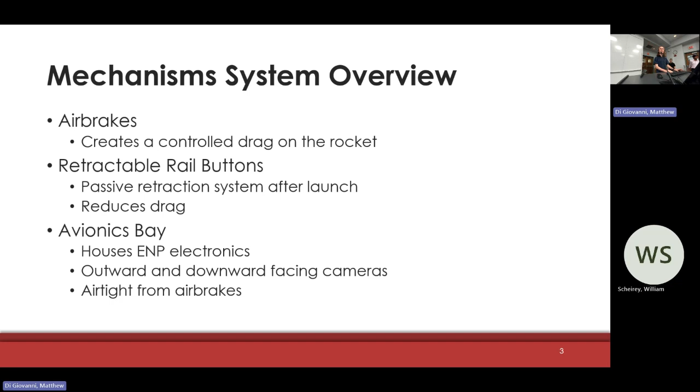So this is the two-stage rocket mechanisms PDR presentation. For the mechanism system overview, we have three subsystems: the air brakes, which creates a controlled drag on the rocket; brand new this year, the retractable rail buttons, which will implement a passive retraction method after launch to reduce drag that rail buttons cause; and then we also create an avionics bay, which houses the electronics flight computer. It'll have some cameras, and it needs to be airtight from the air brakes themselves.

This year, we have changed a little bit of how the systems are interfacing with the rocket itself. The plan is to create a bay that goes completely in between two couplings. The top plate and the bottom plate would attach each to a coupling. There would be rods through the center for structure, and then that center coupling would separate the avionics bay at the top from the air brakes at the bottom.

So for our air brake system, we have Raj and Hayden. For our air brakes, compared to last year, we have some design requirements that we do need.

Where's that laser pointer? It does need to fit within the allotted space that we've been given. We can minimize that if we have extra, that's good too. But we're trying to improve and make more efficient the amount of space extending past the sides of the rocket, giving us more than the 5¼ inch squared of extension outside of the rocket that we had last year.

The fins that do come out, we have a fin system. They need to be flush at launch to reduce drag there. And when they do extend, we need to make sure that through their entire movement, they don't create a moment on the rocket, messing with the rest of the control systems, messing with any of the guidance systems.

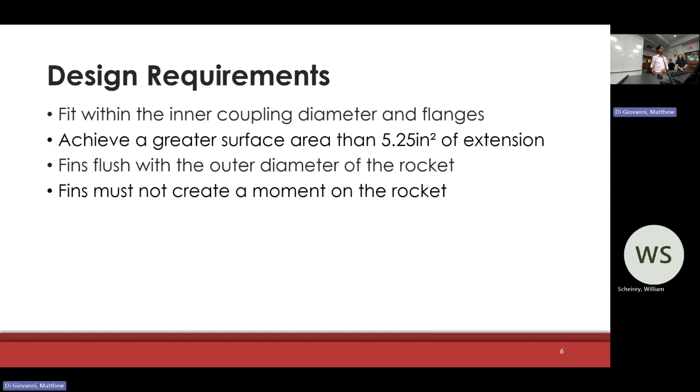Earlier, we had a separate design that we had played around with. It was based off these petals that would rotate out of the rocket, controlled from a gear mechanism on the inside. But we decided it wasn't really feasible because the amount of area we would get outside of the rocket would have been 5.76 inch squared of surface area just outside, giving us leeway to put drag and control the rocket.

But as a trade-off, it chunked out over 60% of the diameter of the rocket, and that's going to mess with structure, the stability. So from last year, that was pretty much a downgrade, and we couldn't see any justification to use it because last year we only had around 40% chunked out, and that really kept a lot more of the structure and strength of the tube.

For this year, we came up with a flap design that's been seen before, but essentially we would cut out parts of the rocket tube and attach a mechanism from the inside to extend them from flush to out, and that would let us control the drag that we would put on the rocket.

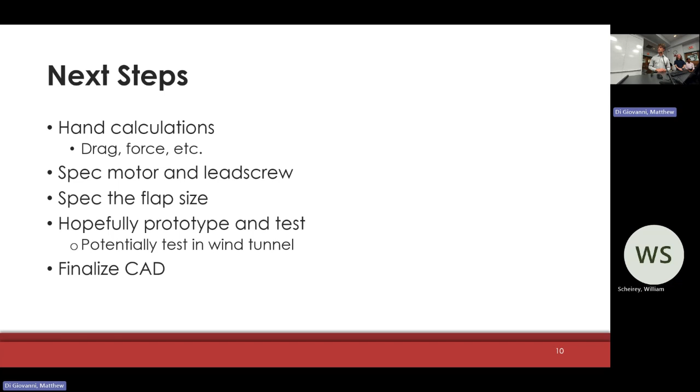I'm in charge of the avionics bay. My name's Colin. For the design requirements, we have to fit all the components from the electrical inside the coupling designated for the av bay.

We include 2 cameras, one facing down similar to last year for the air brakes, and one having an external view. We also need to mount the flight computer, the battery pack, external GPS, and then verify that it's airtight with the air brakes.

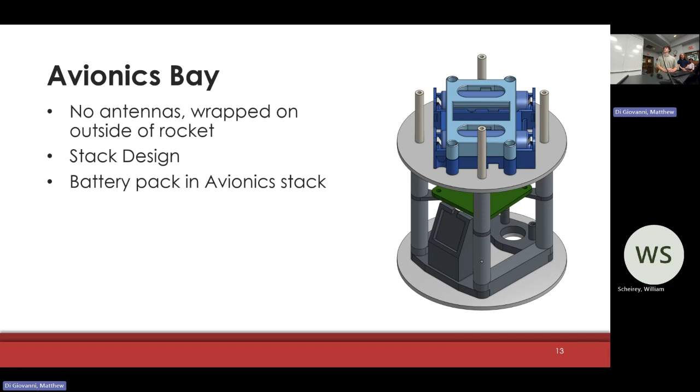So we don't have to worry about the antennas this year. Last year we mounted them; this year they're going to be wrapped around the outside of the rocket. We're going for a stack design similar to last year, but differently, we're going to mount the battery pack in the av bay to help with wire management and give the air brakes more space.

The rods for the structural support right now are about 1/4 inch in diameter. That may change due to structural support with the air brakes, and everything is pretty much subject to change depending on ENP.

So moving forward, we have to get approval on the design, integrate it with ENP, and adjust the dimensions. Then we're questioning exactly where to mount the battery pack, depending on weight and wire management—whether it should be on the bottom of the coupling next to the air brakes versus on top.

And we still have to CAD up and design an outward-facing camera, hopefully to minimize drag. That's still up in the air, depending on where exactly we mount it. And then finally, do all the hand calculations for the forces, support, and structural aspects. That's pretty much it.

All right, next up we have retractable rail buttons, which Ben and I are working on. As far as design requirements go, we're making it to interface with a standard 15-15 launch rail. We want a retraction method that causes minimal friction during launch, and we want the button flush with the outer diameter of the rocket after launch.

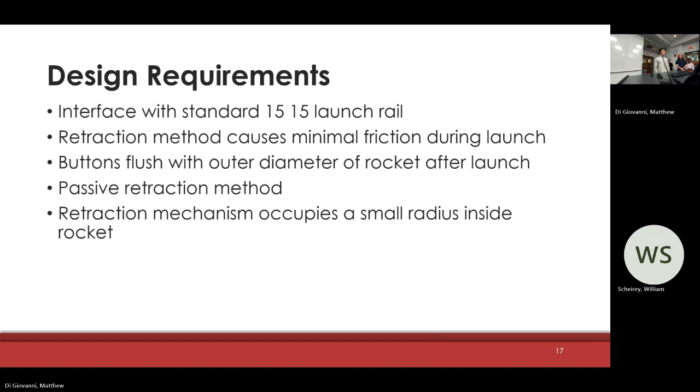We want a passive retraction method, so we don't want to involve any electronics or motors—so we came up with using springs. And then we want the retraction mechanism to occupy a small radius inside the rocket.

And then we'd have something at the back to stop it, so it retracted to the right distance. And then last, we had a linkage design, which utilized two different links, one that wasn't free to rotate on a rail and another one that was free to rotate, and then a spring that would essentially pull it back into the rocket.

So the pros and cons of this design. For the post design, it was the largest by far. The ring around the whole rocket wasn't very practical, and we decided there weren't any major advantages to this one.

The button design was the smallest. It only requires one spring, which makes it the least complex, and it also has the fewest number of parts.

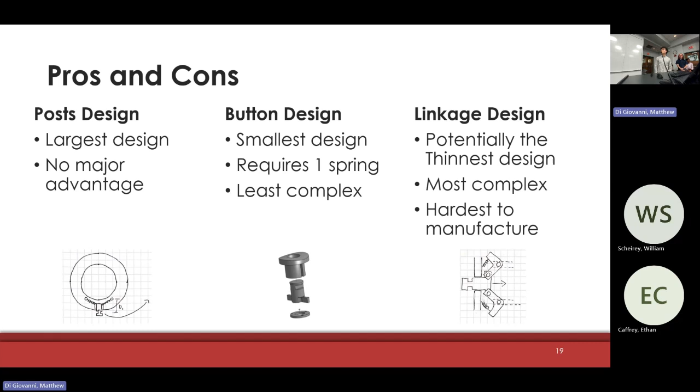As far as the linkage design goes, it could potentially be the thinnest design because it'd be wider than it goes far into the rocket. However, that said, it's certainly the most complex with the two different linkages and the spring, and it has the most parts, which would also make it the hardest to manufacture, which made us believe it wouldn't be very practical to actually do.

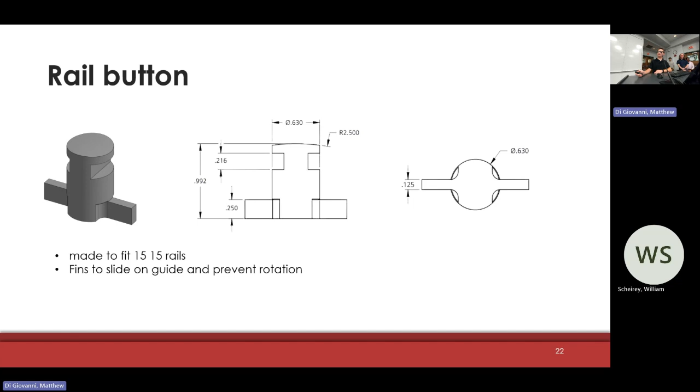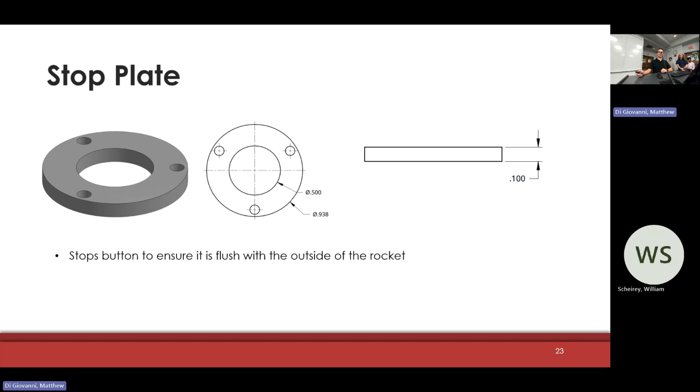And then for the button itself, this would be the most complicated part to design out of this system. Again, it's made to fit those 15-15 rails, and the fins here help make sure it aligns properly. It again has that radius to try and keep it as flush as possible. And then the stop plate is very simple, and it just helps keep the button from going too far into the rocket, so it's again as flush as possible, reducing as much drag.

And then next steps would be hand calculations to inspect the spring, to figure out how strong the spring needs to be, what forces are involved to make sure our mounting mechanism will work correctly, and then hopefully do some prototyping and testing, and then finalize the CAD with that mounting mechanism. Any questions?

No, we would need to calculate the force that would be pushing in on the flaps before we can spec the lead screw. So that's all planned to be done in the future.

We have not looked into speccing the motor yet, but if that's required or wanted by EnP, we would look into that.

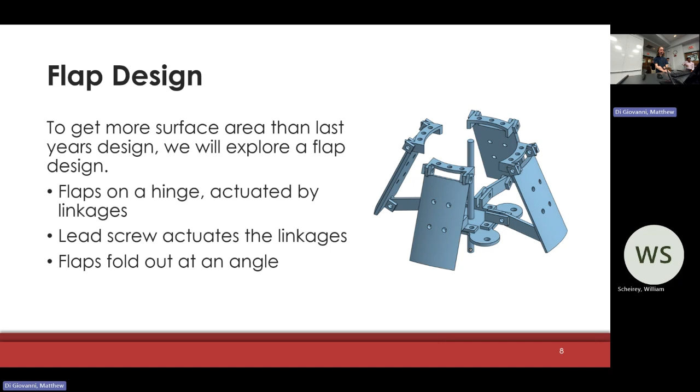What percentage of the body tube is missing? I know you had actual percentages for last year, so do you have any idea for this one, especially with it having to not be exactly flush. So how it's modeled right now, there is no tube on that bottom section.

We can look into adding sections of the tube back, but it would be a considerable amount of tube missing. That's what those rods in the middle are for, so we're depending entirely for that section of the rocket on the rods.

What are the rods made of? We have not looked into speccing that yet.

Kind of a similar question. So if this is completely open, I would be a little concerned about air pressure affecting the mechanisms.

So you're saying it would almost look like how it does in the render, just kind of open? Yeah, but there'd be... We imagine the rocket tube kind of cut 4 ways, and then each of those 4 pieces would be attached to those flaps. So when it's folded together, it all comes together and it's one tube.

And then you're saying there's not going to be an inner tube? Yeah, there's no structural support from the tube, but it's there for aerodynamics.

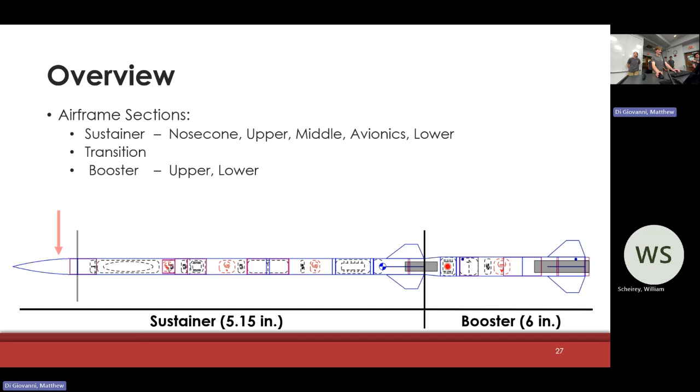So the two-stage rocket is broken up into two stages, the sustainer and the booster. The different sections that need to be built are the nose cone, upper airframe, middle airframe, avionics airframe, lower airframe, a transition tube between the two stages, and then a booster body tube, upper airframe, and lower airframe. One key thing to note is that the sustainer has a diameter of 5.15 inches, and the booster has a larger diameter of 6 inches.

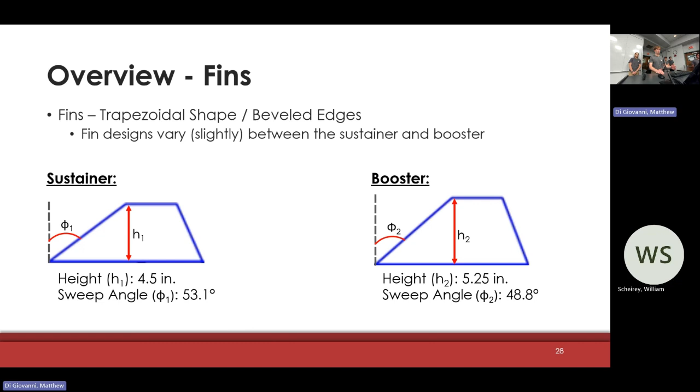Now to talk about some of the analysis work we're doing. We're performing finite element analysis on the fin can assembly using Abaqus CAE. You might be wondering why we're not using Ansys, and the answer is because it has some struggles with interfacing between composite layers, which without proper interface can lead to possibility of composite failures. Obviously we don't want that when analyzing everything we need to analyze.

Some analyses we plan to run are thermal load tests, which will study how thermal energy affects the structure over time; thermal stress analysis, which will study mechanical stresses that develop in the material due to temperature changes; modal analysis, used to determine the natural frequencies and mode shapes of a structure, such as in fin flutter calculations; and dynamic analysis, which shows how a structure actually responds to real-world time-varying forces, such as thrust buildup, launch pad vibrations, and stage separation.

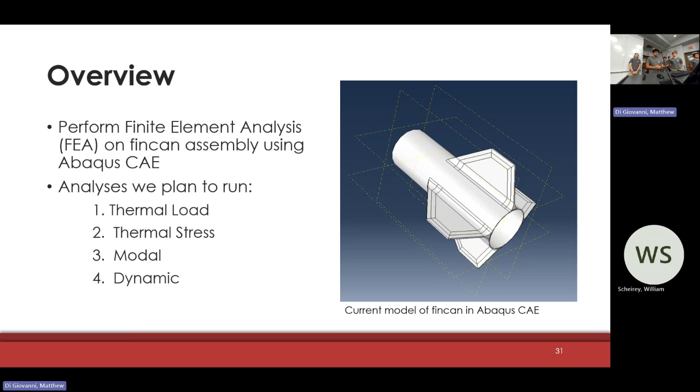Building off of previous work from last year, they studied and analyzed fin phenomena such as fin flutter, and they manufactured and tested composite coupons. Different from what we're doing, they used Ansys to make structural and CFD simulations based on their fins, using experimental data that they got from their composite coupon tests.

For our progress in A term, we have built familiarity with Abaqus. We used tutorials and began working on our FinCan model. We learned how to create partitions on imported models in Abaqus. A partition is a separation made between different parts, such as the fins and the body tube, to allow us to assign different material properties to get more accurate results with our finite element analysis. These partitions are particularly important for assemblies that have a lot of parts, such as the fins, fillets, and the body tube.

We also researched testing procedures and obtained access to the Materials Testing Lab to actually conduct those testing procedures. And we learned how to use the results of testing to calculate the required material properties.

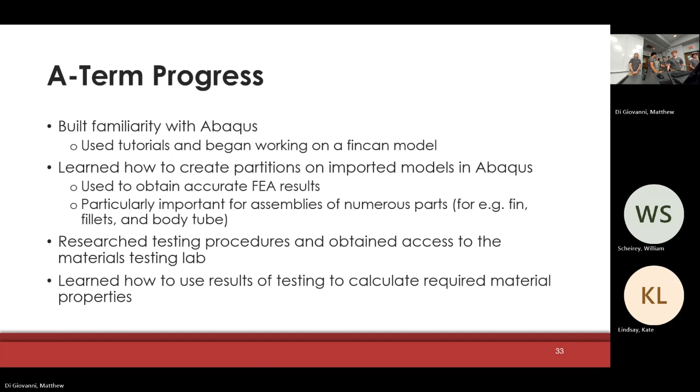Two different types of tests that we'll be conducting to determine the material properties are a tensile test and a shear test. We'll be conducting these tests using coupons made in the shape of dog bones, so that we can center the forces into the center of the coupon to more accurately understand how the tensile stress affects the coupons.

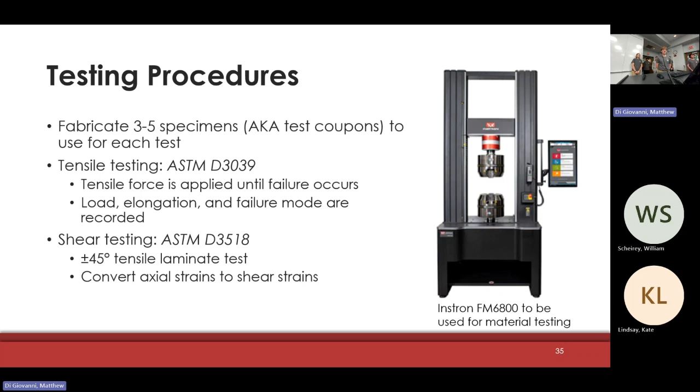We will be fabricating between 3 to 5 specimens, and we'll be conducting these tests according to ASTM procedures. We will be doing them on machines like what you can see in the slide, such as the Instron machine, which is a tensile testing machine.

Based on these tests, we will be determining the different material properties, namely the modulus of elasticity in the 1, 2, and 3 fiber directions, the Poisson's ratio in the 1-2, 1-3, and 2-3 planes, and the shear modulus in the 1, 2, and 3 axial directions.

If you are unfamiliar with the composite coordinate system, 1 refers to the direction that the fiber is running, 2 refers to the transverse direction, going perpendicularly, and 3 refers to perpendicular but in the upward or downward direction. The planes of 1-2, 1-3, and 2-3 are combinations of those directions.

One of the major design challenges our composite team tackled this term was how to bevel fins, and more specifically, how to design a jig for making beveling fins easy and fast. A bevel is essentially a chamfer on the edge of the fin that makes it more aerodynamic by reducing drag. But we need to be careful not to bevel it too much, where it would create essentially a knife edge that could potentially damage the fin when it impacts the ground.

Building from this, our design requirements were a 4-degree double bevel on both the leading edge and the trailing edge of the fin, and a 1 millimeter flat between the 2 bevel sides to avoid a knife edge that's both dangerous and potentially damaging for the fin.

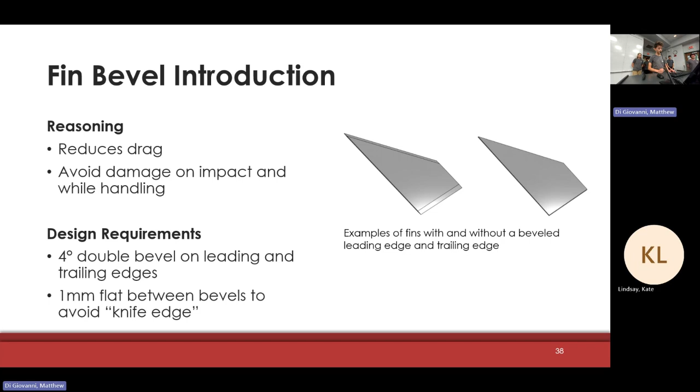One important thing to note is that this sanding jig has a physical stop that prevents the fin from going in too far and taking off more material. So the sanding procedure is pretty straightforward. No need to do any weird measurements or markings. It should be butted right up against the hard stop.

So the pros are that this is fully 3D printable in one piece. It fits on the side, about 8.5 by 8.5, so it'll fit in the bed of a P1S or similar size printer. It's got 0 moving parts, so minimal assembly and mounting time. Fairly easy to sand one bevel in one smooth motion, so no need to go in and out and potentially lead to uneven surfaces. And it locates off of pre-existing holes, which makes it pretty consistent on the sander and should lead to minimal setup time.

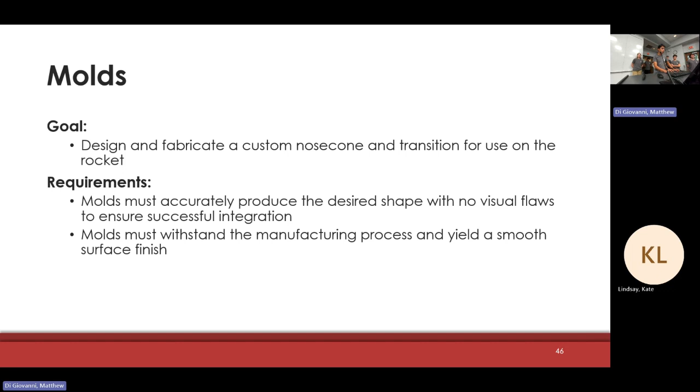Then we would apply a gel coat to give us a super nice finish. Then we would apply our composite layup - that would be half the mold. Once that cures, we could take off the parting plane of the supporting structure, flip it over, and do the other side.

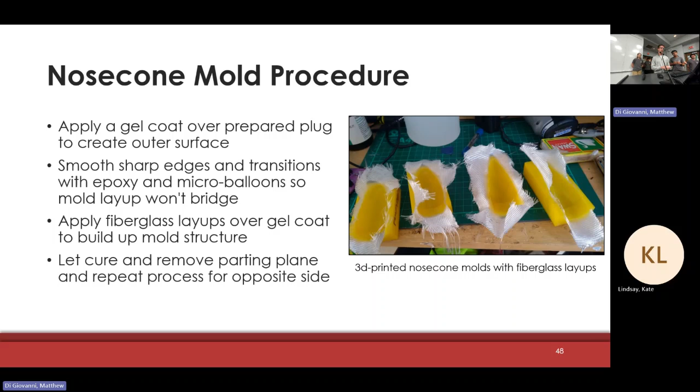So here's some of the procedure. Like I said, doing it in 2 separate parts, we would do traditional composite layup for both sides, and that would give us some really good finishes and good durability. Going more into the pros and cons - surface finish would directly mirror the plug, so we could spend a good amount of time making the plug very nice, and that would translate to the mold. Secondly, our mold is going to be very strong because it is just composites.

And that would allow us to do future manufacturing processes like autoclave or heat for curing. The mold would be very long lasting - it can be used for years and years because it is composites again, and it can be cured with heat and other types of curing techniques like autoclave.

Some of the cons are it is a bit more labor intensive and does take some more skilled labor to produce, as well as being slightly more expensive than just using something like a 3D printed mold.

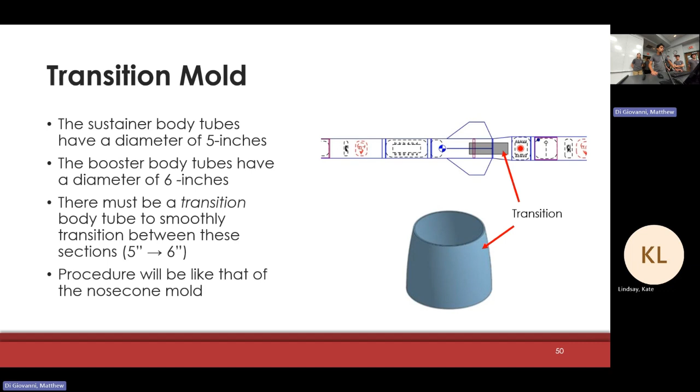Okay, so onto the transition mold. As previously mentioned, there is a small 1-inch difference between the diameter of the sustainer body tube and the booster body tube. Thus, that's why we need to make a transition body tube to make a smooth transition between these two sections of body tubes. The procedure that we use for the transition mold is the same that we use for the nose cone.

So we have some additional manufacturing planned for later in the year. The first of which is fillets for the fin can. Fillets are the material that bridges the gaps between the fins and the tube itself. The fillets help increase the aerodynamic efficiency as well as the structural integrity of the fin can. We plan to create the fillets using a two-step process of an inner fillet and an outer fillet. Both are constructed using epoxy mixed with silica powder. The silica powder and epoxy is applied to the fin tube and shaped using a fillet tool.

The initial layer is built and then shaped with the fillet tool. The outer layer is placed on top once the inner layer cures, and then is shaped using a fillet tool as well as a dowel, which is placed on for the initial setting process in order to maintain the desired 1-inch radius.

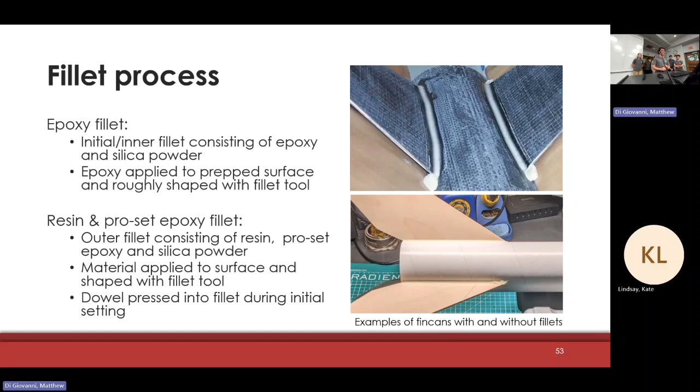We also have layups, which increase the structural integrity of the fin can. We use a wet layup process that includes stacking composite layers of fiberglass in a 90, 45, and 90 degree orientation. I have pictures of some practice layups we've done during A-term. The procedure includes applying a layer of epoxy to the fin can, applying the layers of fiberglass, and then layers of peel ply and breather layers, which help secure the layups in place. Then we vacuum bag the entire fin can for even distribution of pressure while the layups cure.

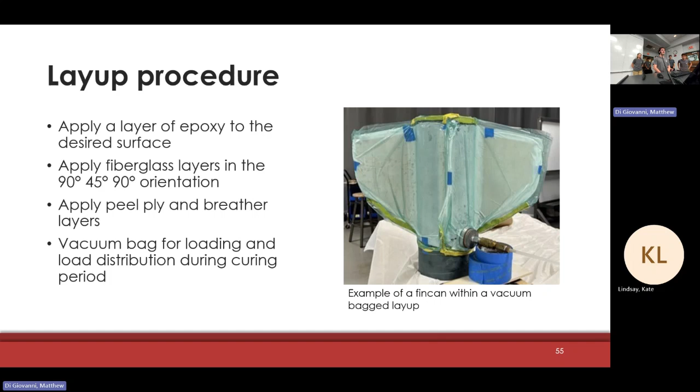The entire thing's vacuum bagged for even load distribution. I have a picture here showing an example of a fin can that is vacuum bagged. And that is all. Questions?

Nose cone—have you guys thought about putting a tip on it or anything?

As far as that goes, we haven't got that far ahead yet. That's been outside of the scope of our model, but in the next few weeks of B-term when we finish up the model, we're definitely going to consider doing that and look into how it would benefit our model. We haven't decided on aluminum, but we're not going to have the composites go directly to a point. It's going to stop a little bit before, and then there's going to be a little tip that screws on, because it's much easier to mold it and do the layup when it doesn't go directly to a point. So yes, we will.

I know you talked about post-manufacturing testing to make sure you're within the right specifications and tolerances. How is that going to work for your fillets? The fillets are a pretty standard procedure, tried and proven in the past, so there's not much testing that needs to be conducted to ensure they work. Are you referring to the material properties, or the physical dimensions? The physical dimensions are just standard, and the angle for the leading and trailing edges is something we are not calculating.

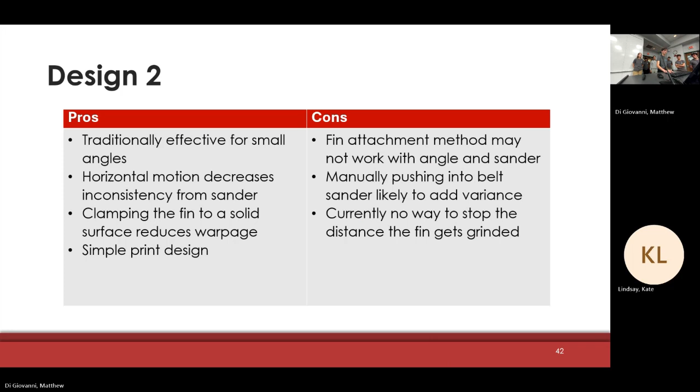That angled portion on the first model is already at the degree needed, so the actual angle of the bevel will be correct. It comes down to the length, which I need to make a hard stop for, to get the right length. Right now I don't really have a way to stop that length, but that's what I'm working on to fix.

Slide 36, I just had a quick question.

So you're going to perform FEA on the fin cans—is that the entire can with the fins, the entire structure? That's a big reason why we're using Abaqus over ANSYS, because you can use partitions to separate all the different materials and parts of the entire fin can, and individually and collectively simulate the fin can.

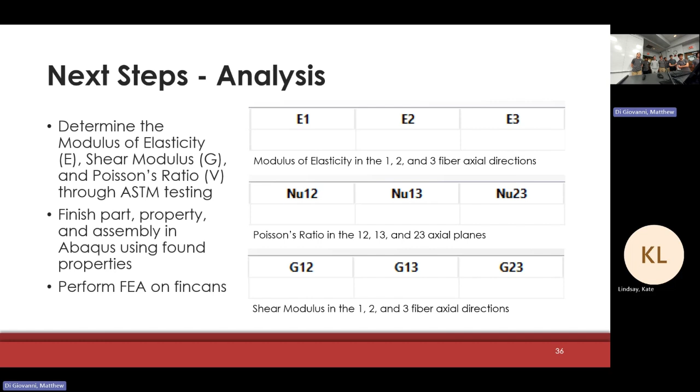Could this jig be made out of aluminum? I know you're thinking hard material. That would be a lot of material. I think first we're going to test one out of 3D printing, see how that works. If there are a lot of problems, we did look at other materials—one that came to mind was using a glass plate, or something similar like a Creality 3D printer plate, on top of this surface, so that even if the 3D print comes out a little uneven, you can put something flat on top so the fin always has good contact area. Yeah, aluminum would cost a lot and take a lot of operations, but—three parts, right, two sides.

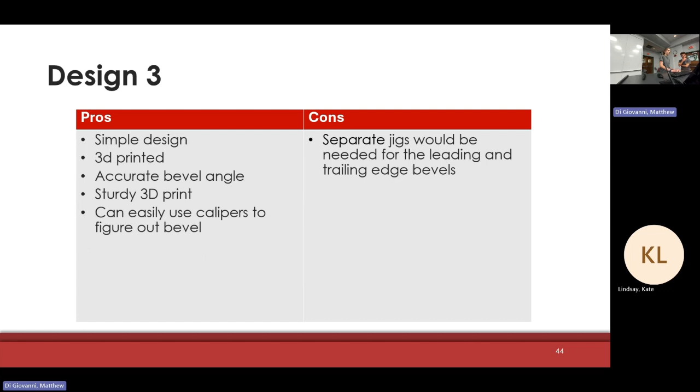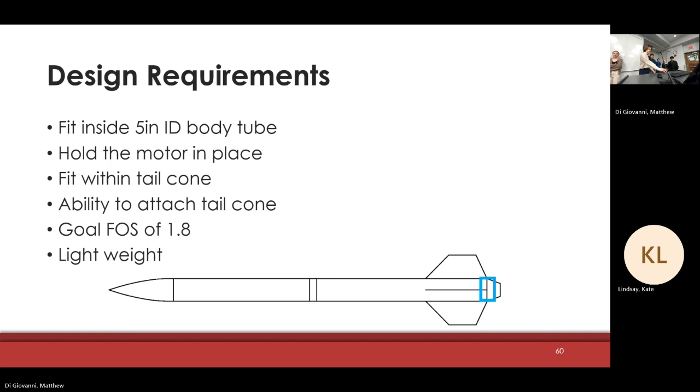Oh, there we go. Yeah, that's right. Okay. So going into, oh, the slides are being slow, and now it's back. Okay, so the first design that we explored was using an Aeropack retainer.

We're currently researching the pros and cons of making this in-house versus purchasing it. So I'm going to talk about some of those.

So for making it in-house, some of the pros that we talked about was, for starters, it's a learning experience. You're making it yourself. It also allows for more customization and opportunities for weight reduction because we're able to design it ourselves, and also more likely to fit in the tail cone because we can create the dimensions ourselves since we're designing it.

And then in terms of cons for making it in-house, we're going to have to pay more attention to designing for manufacturing. We're also going to have to spend time manufacturing. And then we're also going to have probably larger tolerances because we're less capable of manufacturing it versus a professional company.

So for purchasing it, the pros of that are easier manufacturing process, and it's a method that's worked in the past. Some of the cons of that, it might not fit in the tail cone since the dimensions are fixed and we can't edit them, and also there's less opportunities for weight reduction.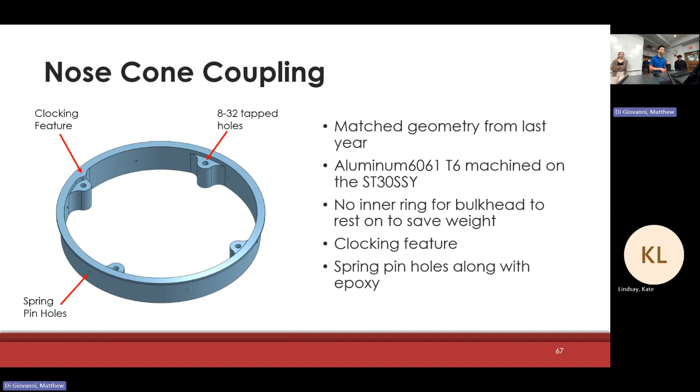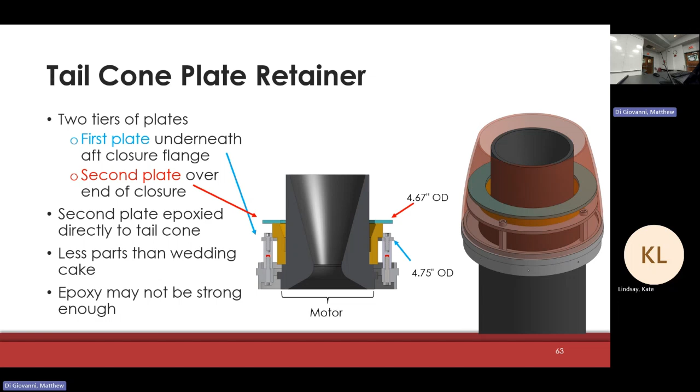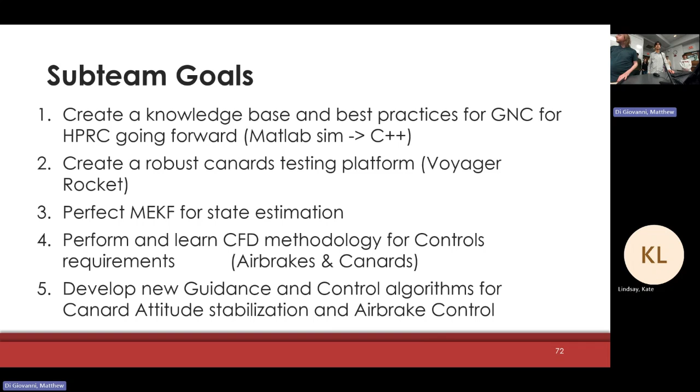Additionally this year, for our smaller projects, we're creating a canards testing platform on the Voyager rocket, a small rocket going to about 900 feet. We are also developing a new state estimation algorithm called the multiplicative extended Kalman filter. Additionally, we are doing CFD for the air brakes and controls, as well as developing new guidance and control algorithms for canard attitude stabilization and air brake control.

Timeline-wise, for last term we designed the canard hardware and developed the multiplicative EKF and control algorithms in MATLAB. For this term, we are looking to deploy the multiplicative EKF in C++ for the November 15th launch and have that as a first test.

We want to finalize some of our control algorithms and test some of them for cost-benefit analysis. We are going to perform CFD on the two-stage rocket and get that ironed out for our air brake controllers, then make the actual controller in MATLAB and manufacture our canard system for the Voyager rocket. In C term we're launching, and in D term we are going to do more work with the air brakes.

Okay, that's off to Kieran. Hello, I'm Kieran, I'm in charge of CFD for this year. For CFD, we ran simulations on the canards, but in order to know what we are getting from the CFD, we have to determine the major challenges of installing the canards.

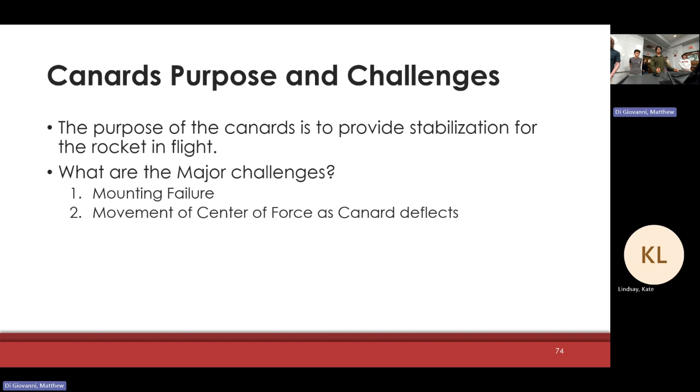The first major challenge is the mounting - how are we going to mount it onto the rocket, and what kind of forces does it have to withstand from when it's going up and at its max airspeed? We also have to account for how the center of forces, or center of pressure, moves as the canard deflects to actually apply a pitching moment.

So in order to configure our computer simulation, we have to put three main parameters into the software, which is ANSYS Fluent. We put in the max airspeed, which we got from OpenRocket, and that was 271 meters per second. We have to put in the canard deflection angle, and we have to tell the computer what kind of equations to use.

For the deflection angle, we did some research, and we found that a max deflection angle of 25 degrees would be optimal, as it provides about 70% of the max lifting force without encountering major forces or flow separation. However, there can still be a small amount of flow separation at 25 degrees.

So to account for this, we're using the shear stress transport model for the computer, abbreviated SST K-omega. This includes equations to account for vortices that may form and flow separation along the edges of the canard.

So after we got those parameters, we inputted them into the simulation, and this allowed us to get the max force and the max moment experienced by the canard, both at 25 degrees. It was 72.9 newtons and a max moment of 1.74 Newton meters.

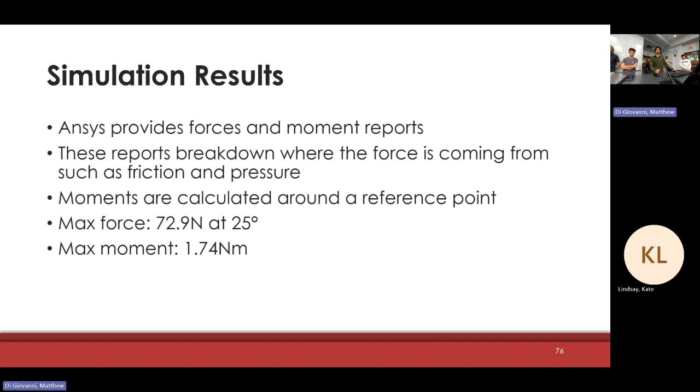It also gave us a breakdown of where these forces were coming from, such as if it was coming from pressure or from friction against the air.

This gave us a value of 23.6 millimeters back from the leading edge of the canard along the chord line. This is about 45% back, since it's a 50 millimeter long canard. Then at 25 degrees, when we redid the calculations, it gave us 23.1 millimeters, which is a good sign because that means it makes our mounting easier to account for, since the center of pressure isn't moving as much.

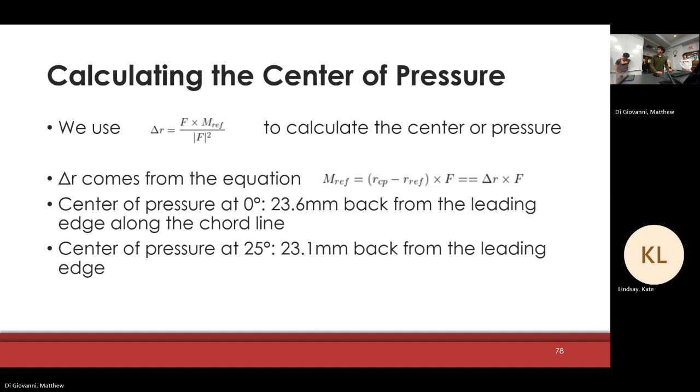With that, I will pass it off to the hardware team.

Hi, I'm Joe, and along with Noah, we did the hardware development for the canards. So, some of the guiding principles we looked at to shape how we approached this design.

Because this is a new experimental subteam, we're operating under the assumption that a lot of things are going to change and a lot of things are going to break. As such, we put a very high priority on modularity and adaptability to future use cases. We wanted the core canards module to be something that can be used for projects we haven't even anticipated yet, and be able to handle loads we aren't necessarily expecting on this initial iteration.

Also, to make life easier for the people on the software and controls side of things, we wanted to ensure that it would be as rigid and responsive as possible, both in the mechanical design and some of our electrical component choices. So keeping those guiding principles and some of the hard design requirements in mind, our design architecture ended up being...

...a servo linkage that allows for independently controlled canards. Each canard can be controlled in terms of the degree angle independently. That can allow for pitch control, but later on also roll control, and also pitch and yaw control if that's something we want to pursue later.

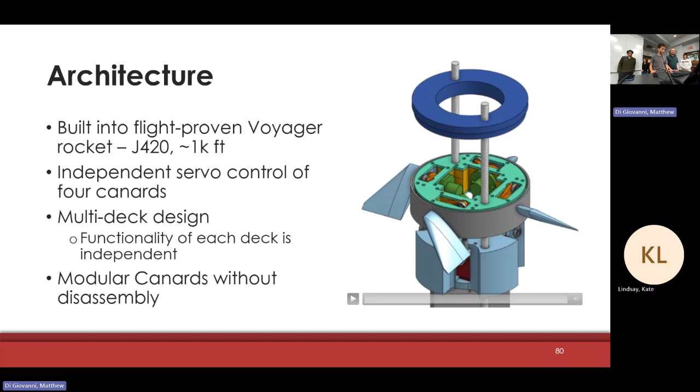Starting from the bottom, the entire system will be powered by four 18650 batteries, so about 7.5 volts, which is more than sufficient power for the servo we chose. We're going to be using COTS battery holders. One thing to note is that the batteries are horizontal, so that when the rocket accelerates upwards, we're not going to lose contact with the battery leads and get wonky results from that. The batteries themselves are offset to allow for fastener clearance and for mounting accessibility in order to connect the two decks together.

And then in the middle, there is a switch and a little channel for wires to go up to the switch, power wires to go up to the switch, which then go back down to power the servos.

This 3D printed piece here is both constraining the subsystem as well as providing mounting positions for the servos. We've got 4 servos arranged in a circular pattern. Highlighted there is where the servo sits and where the cutout is. The little divot is for wire clearance to allow for wires to snake up and around to the switch and then down to the batteries.

One thing to note is that the profile is radially constrained using this 3D print, so it'll probably be 3D printed out of something like PETG. Depending on how much weight we're using, probably 20 to 30% infill. We haven't run the exact numbers yet, but the weight should be pretty manageable, and the thing is pretty tall, so it should counteract any bending forces and stabilize the system.

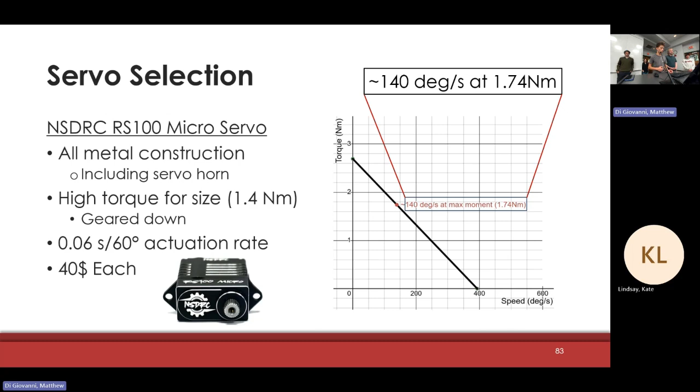Moving on to the canards level, taking into account the numbers we were getting from CFD, we did a quick shaft bending analysis to make sure that normal force wasn't going to deflect things. This is with a 1/4 hex aluminum profile, which you'll see the reasons for on the next slide. The deflection under those loads is really trivial, not a big concern, but it's nice to have the system overbuilt in case you're going to be using potentially larger canards in the future. There are also some practical reasons that set a minimum size for this shaft.

The simple solution would be to have your shaft built into the canard and just connect the linkage assembly directly onto that. But in practice, that would be really difficult because anytime you need to replace the canard, you have to take apart the whole linkage, undo shoulder bolts and such, and take things out of bearings — it would be a whole procedure. So we wanted to make it operationally much simpler, even if part-wise there's a bit more going on.

So we came up with this female hex sleeve design, where the shaft that the linkage is driving is actually a hollow hex profile that then interfaces with the male blue hex profile on the canard. That is retained in place by a set screw that is captive in a groove.

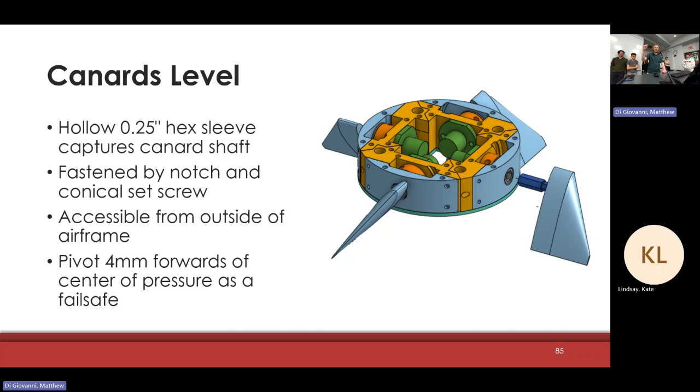You'll also notice that the pivot point is forward of where we calculated the center of pressure. That is intentional, as a failsafe. So that if there's any kind of electromechanical failure with the system, the canard has aerodynamic stability and it will tend toward pivoting to a zero angle of attack position. So you're never in a situation where the canard is locked in a position giving a strong control authority command that we did not intend.

So getting more into the cross section here, you can see the dark blue is that canard shaft, and the gray stepped profile there is the captive hex sleeve. It's just geometrically constrained between the bearings on either side of it. The reason that set the minimum size for it is we didn't want to have to buy an expensive broach and then abuse that broach by making a hex hole several times its diameter. So the sleeve is turned out of its COTS aluminum extrusion, and quarter-inch hex internal is just the minimum size for that.

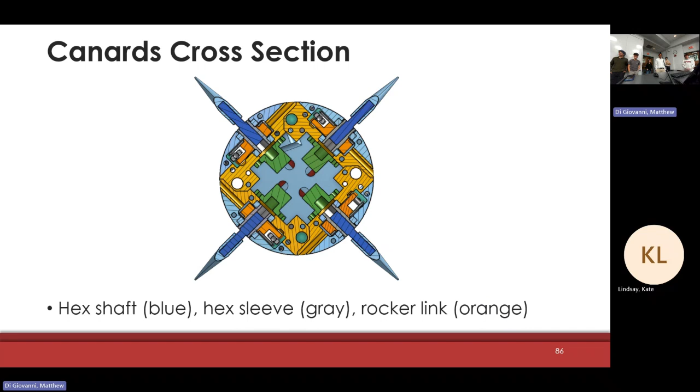And then the orange part is this link right here, your rocker link, the other side of the linkage. That would be press fit to the core sleeve with a Loctite 609 to get a solid bond.

You're using M3 shoulder bolts for the pivots, and we have absolute encoders directly on the canard shaft for feedback. We use the US Digital MA3.

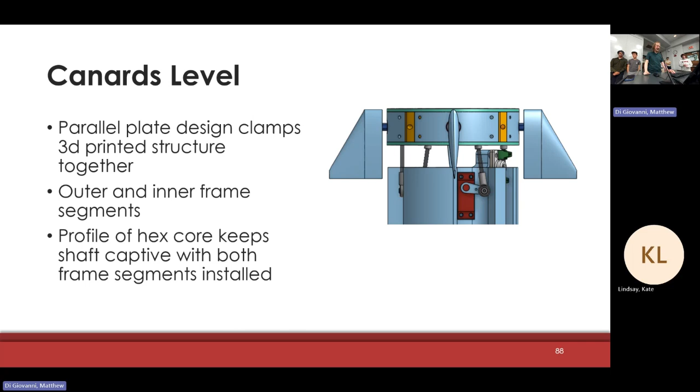The whole structure is held together by these two parallel aluminum plates. There are inevitably some thin sections in these 3D prints, so passing some of the structural load onto those parts helps with that. The electronics level, which we haven't gone into yet, is basically going to be standoffs above the canards level. We'll be looking more at that in B term.

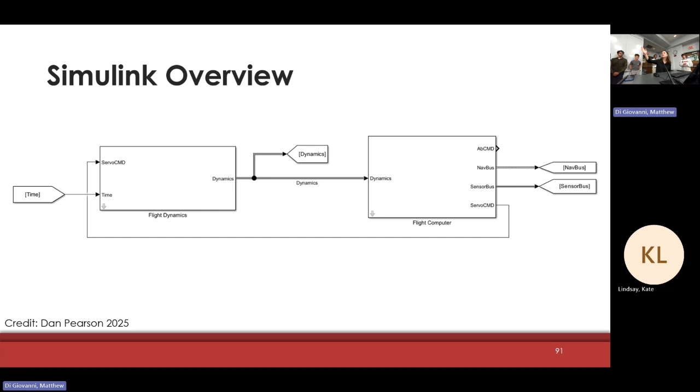Essentially, this is a Simulink model. It consists of both the plant model, which for those unfamiliar, models all of the natural rocket dynamics, and the flight computer itself, which is the piece we'll be most interested in. This is where, for modeling purposes, we implement the sensor fusion, which these guys are going to talk about in just a second, our guidance algorithms, and our canard actuation commands.

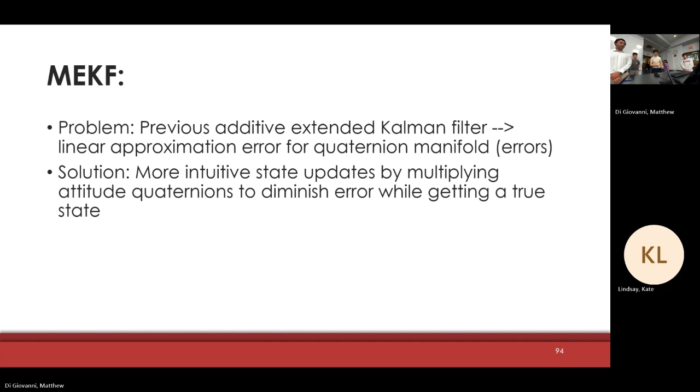I also worked on the MEKF. Just extending on this—I don't really know how to play the video, but basically the reason why we have an MEKF is because it's simply a means to an end. The importance behind it is that the end goal is to have a reliable estimation of where we are, because knowing where we want to be is only half the equation. The other half is knowing where we currently are. And knowing this allows us so that when things go wrong, because they inevitably will, we know exactly how they went wrong, which is actually the important thing.

So over here, it allows us to have our estimations. We can have it in quaternion format. We can have the Euler angles derived by it. If the video would play, the animation will...

Knowing where we are accurately allows us to do cool things like actually modeling it, whether in 3D. More importantly, we could plot our expected versus our realized outputs or states. Knowing this, when things go wrong, we know what to account for and what we need to improve in the future, as opposed to our past time steps and our current and future predicted time steps.

My name is Abe, and we're talking about EKF math.

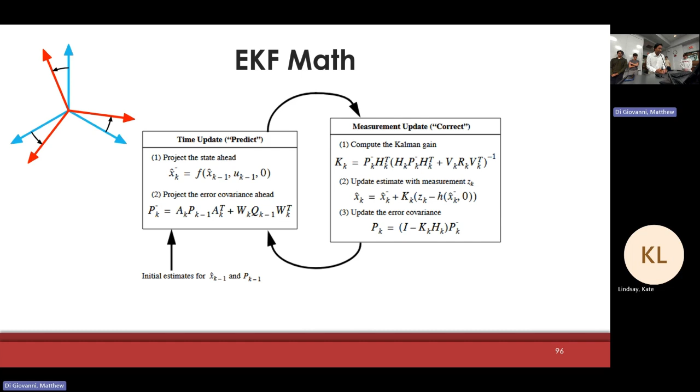Over each time step, we take in our measurements and need to use how much we trust each measurement, combining that mathematically to give us what we think is our true prediction. The first equation predicts our next time step, and then we propagate the covariance, which is how much we trust that. We then calculate the Kalman gain, which is how much we trust our sensor versus how much we trust our initial guess. Using those covariances, we get that value, which tells us how much to trust our initial prediction versus our sensor measurements.

Here is how a MEKF, which is what we do, is different. The first equation takes in the angular velocity from the gyroscope and integrates that over time, multiplying by delta time. Converting that into a quaternion, we multiply by our old quaternion to get our new quaternion. So basically we take how much we rotate and rotate our estimate by that.

The second step is our vector measurements and correcting based on that. We rotate by where we think we are and compare what we're reading in our magnetometer and accelerometer to what we should be reading in that direction. Like with the Kalman filter, we compare what we think versus what we have and use the covariances to tell us how we should move forward.

Another difference about the MEKF is that we actually model our errors instead of the actual state. It's kind of complicated, but it's just easier to model the errors instead, so we add the errors back in at the end to give us our state.

Hi, I'm Chris. Now that we have our MEKF working in MATLAB and in simulation, we intend on implementing it into C++ by November 15th for the lift rocket. We also need to make it more accurate and more robust in doing that. We also intend on using multiple IMUs in the rocket, resulting in nice sensor fusion and even better state estimation.

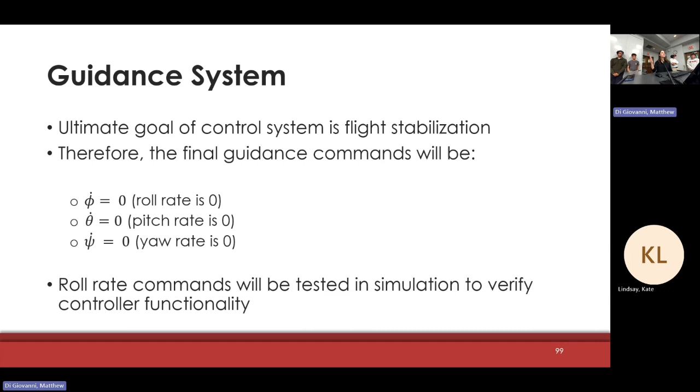Some of you may have questions: if we start out at a pitch of 5 degrees, can we correct for that and make it 0 degrees? No, we cannot, because that is not stabilization.

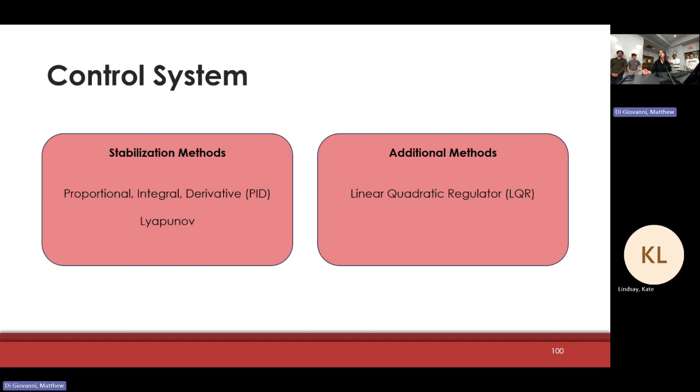For a control system, for stabilization purposes, proportional integral derivative controllers and/or the Lyapunov controller are pretty straightforward and a good way to do that. If we have extra time and want to be crazy about it, we can do something like a linear quadratic regulator, LQR controller, but that will come in time.

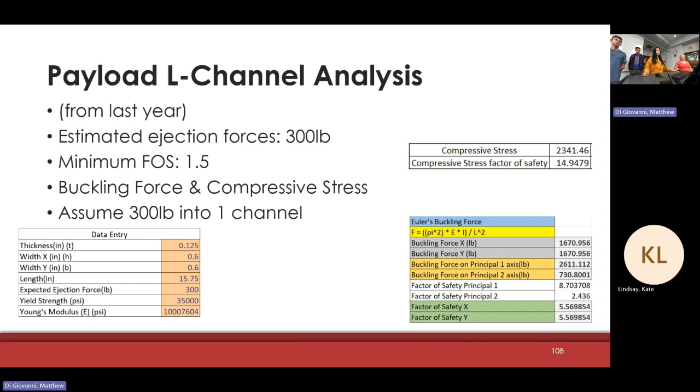For the L channel analysis, they're based off last year's data. So as we said, ejection force of 300 pounds, and we need a minimum factor of safety of 1.5. So based on the yield strength of 35,000 PSI, we had a compressive stress factor of safety of 15. So that's good, yielding is not a concern. And with buckling force, we had a 2.4 factor of safety, that was the lowest one, so that's good.

So if you saw the payload last year, we're making a few minor changes. Obviously, the main difference is that we are changing the location from being directly opposite of the nose cone last year to now we are directly against the nose cone, which does bring up the dilemma of, hey, there's an eye bolt right there. So the way we went about attacking that was we got rid of the 4th paddle that we had last year.

We also chose some new servos, which Zach will talk about in a sec, basically so that we can actually use them. And then further into this term we are going to look at if it's necessary or helpful to have new geometries, whether that be with our gear ratios or with our linkage angles that connect our paddles and the main gear in the middle.

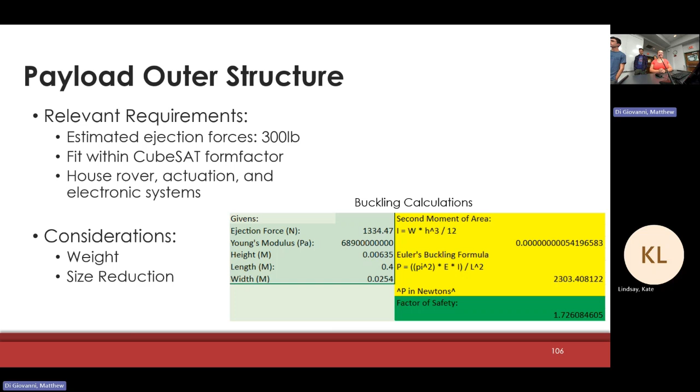So if the self-righting is by the nose cone, are you worried that when the nose cone lands, they're gonna be kind of tilted off the ground because the nose cone is wider than the L channels? Correct. So is there a worry that they're not gonna get to the ground where they should? Like if we're not on flat ground, they might be higher off the ground than the paddles can handle. So the paddles are each approximately 6 centimeters. So the difference between the nose cone and the ground isn't 6 centimeters. So I'm not super worried about that unless we determine there's a need to worry more deeply about that.

Yes, Kate, this may be a stupid question. What happens if they land in a bush? We cry.

I was informed by everyone that this would have succeeded had we known how to code the servos and had we had a parachute that existed. So I have, and we'll do more testing this year just to confirm that. But I have no reason to believe that we will land in a bush.

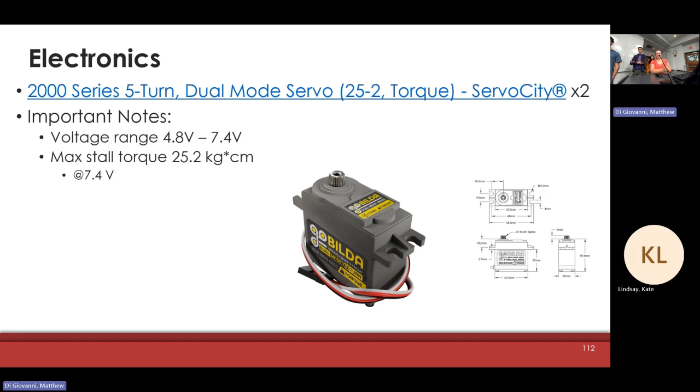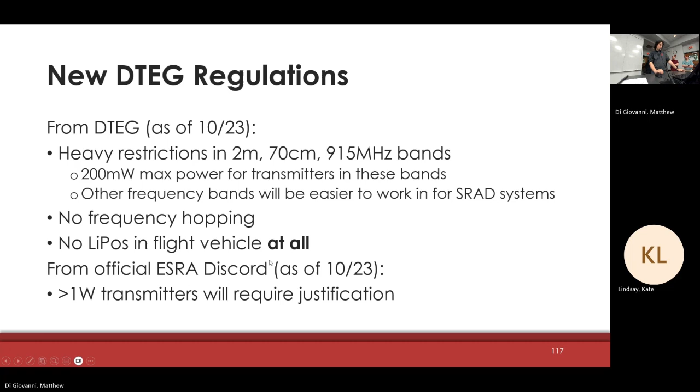As for knowing that our systems will actually perform up to spec, we need to do some more testing. However, the big thing we want to know is how our received power—how powerful the signal we're getting on the ground is—relates to either the packet error rate, meaning how many packets we're receiving but not actually able to decode, or how good our video will look.

And also, how does local noise affect things—it's rather hot down at IREC, so in that case, a lot of the radio systems have issues with noise at very high temperatures. So we need to know how that impacts it.

We've done some basic testing with that in terms of the performance of our systems this past term, but we're doing a lot more of those this term.

In terms of the radio modules themselves, obviously we can't really use the XBees anymore because those are not allowed in the way they operate. So we're using these E-byte modules. We've had some issues with the E-bytes in the past, but that's fine.

LoRa modulation is in the 1.25 meter ham band. Data rate is a little bit lower, but the radio performance is a lot better, which means we don't need as insane of antennas—no big dish—to be able to receive a good signal from them. A little bit higher power, but in reality, the actual power output, as we've measured, is about the same.

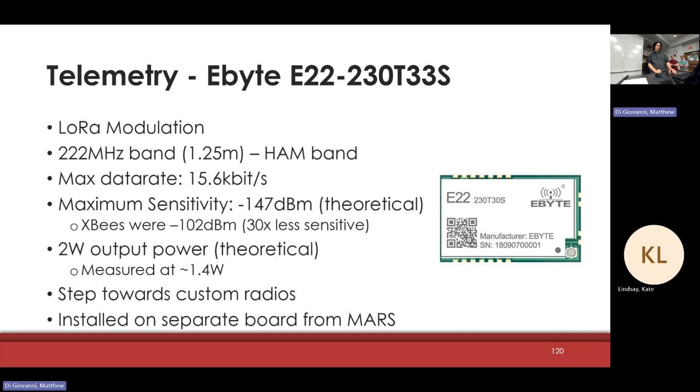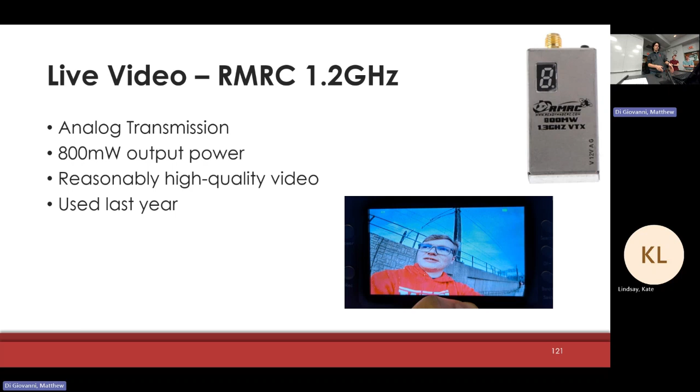Just looking at how much gain we're going to need from our antennas. You do all the calculations for our telemetry with what we assume to be our custom radio modules, needing about -60 dBm of received power.

We would need about 14 dB of actual antenna gain for our telemetry system. We don't necessarily need this with the LoRa modules this year, but with our custom radio modules, which is really what we're trying to build for, we would need about 14 dB of gain.

The live video system is a little bit rougher because you get a much higher path loss due to it being a higher frequency. So for that, we're going to need about 30 dB of gain between antennas and probably amplifiers. So I'm going to now pass it off to Finn, who's going to talk a little bit more about the antennas we're going to put on the rocket.

Hi, I'm Finn. I've done stuff with rocket antennas.

So first of all, design goals. For telemetry, the design goal is to have wide enough bandwidth to handle the fairly wide 250 kilohertz of LoRa, as well as having reliability, which you'll see why that's important in the next slides. For live video, the biggest constraint was making it compact so it actually fits in the avionics bay, and optimizing for gain to increase video quality.

As you can see, the link budget for live video is pretty tight, as shown in the previous slide. For the live video antenna, the plan is to do a spiral dipole antenna with a reflector, which is not like the phase 2 spiral dipoles previously used, but is a little bit more compact. It should be 80 degrees half power beam width, 5.8 dBi gain.

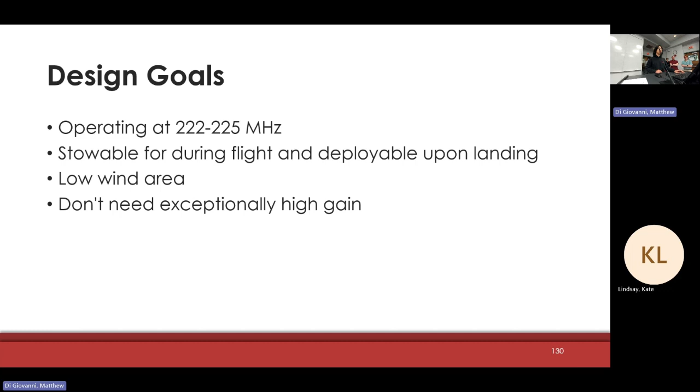For our antenna types, we considered monopole, dipole, and helical antennas. The concerns over the monopole and the dipole were that they would be too tall to fit into the airframe, while the helical antenna would have trouble meeting the requirements of a low wind factor.

Ultimately, we decided on a variation of the monopole, which is a loaded monopole, and it uses a coil, which allows it to be shorter while still being efficient and matched to our desired frequency. This can be easily lowered and raised with a servo, which is convenient since payload already has electromechanical systems in place. It's going to be an omnidirectional pattern with about 2 dBi of gain.

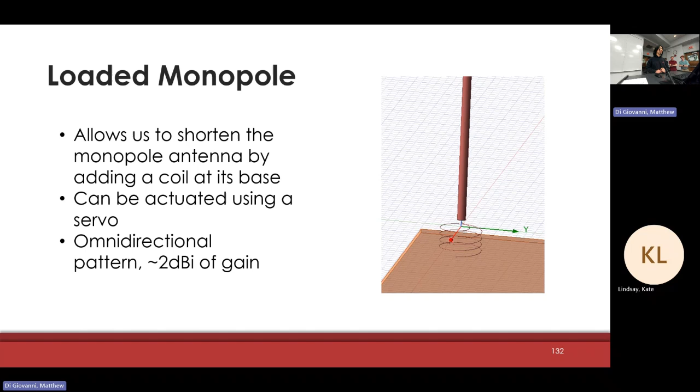For both cases, we believe the best option is going to be a Yagi-Uda antenna. This is slightly different than last year, as last year we ended up building the big reflector antenna. But when taking the entire antenna system into consideration, both the receiver and transmitter antennas, we think we can get away with the Yagi this year.

First off, to talk about the telemetry antenna, the one I've currently got designed does have a fairly large physical size, about 1.8 meters long and half a meter wide. However, since it's not a massive dish like last year, it is significantly lighter, with much less wind loading, and much easier to actuate. The standing wave ratio is under 1.5 for the entire bandwidth that our LoRa modules support, and it has a peak gain of 9.6 decibels.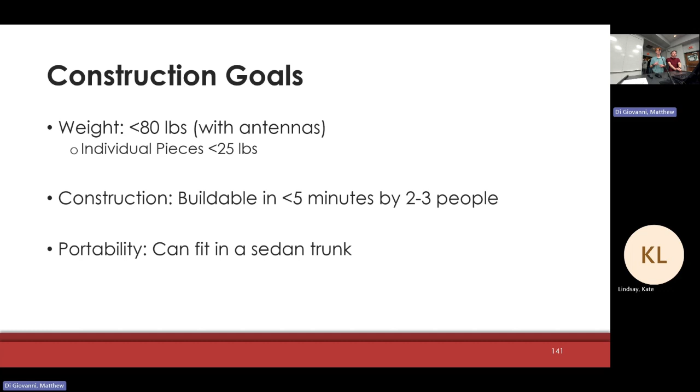Construction goals. We want the entire tracking setup to weigh less than 80 pounds, including the antennas. We want to be buildable in less than 5 minutes with 2 to 3 people, and we want to be very portable and can fit into the trunk of a sedan.

For our design inspiration, we took concepts from last year's tracker and an additional concept from a Rocket Tracker that's non-HPRC related. Some of these features include a significantly better center of mass positioning, especially regarding the center of mass and center of rotation of the antennas. We'll be able to hold 2 full Yagi antennas on either side of the elevation shaft, and we'll be able to use a foldable tripod to save significant weight and size.

It's a bit to unpack here, so I'll be going over the key features in our design. For our concept on the tracker's elevation axis, most of the design choices were made to solve major issues with last year's tracker. We'll be using better sensor positioning and implementation to ensure that there's no interference with positioning sensor data. There will be a direct gear reduction to remove the need for the planetary gearbox, which was used last year and was responsible for a large amount of weight.

Additionally, latching mechanisms will be used on the Yagi antennas to ensure that it can be attached and detached very quickly. And a camera can be mounted to the shaft so that we can track the rocket and provide a much better live accurate video feed than what can be done by hand.

For our azimuth axis, we'll be using an internal gear reduction to keep the assembly much more compact. And in addition, we'll be using a closed loop stepper motor and a Hall effect sensor for absolute positioning.

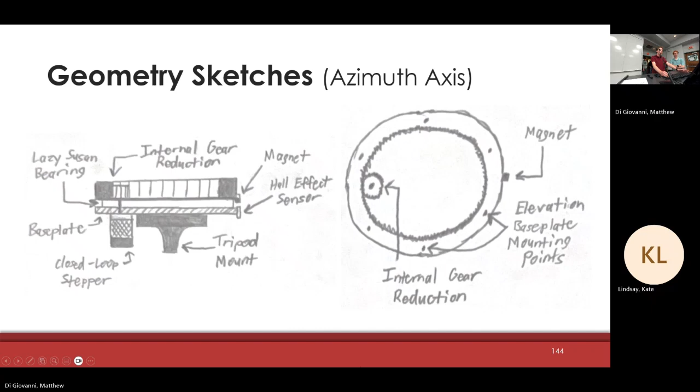For our tripod and electronics, a plate will be holding all our components, which can be easily and quickly clamped to the tripod. This plate can be easily expanded at any time if any new components are needed, and it adds space for physical buttons or switches if we want to change anything in real time.

Some of the key design features we'll be having: there'll be multiple quick attach and release mechanisms, which will shorten our assembly time from 35 to 45 minutes all the way down to 5. Handles will be added to each subassembly, which will make it extremely easy to transport.

There'll be much more reliable, accurate encoder data, which will allow better control of the system, and we'll be using a more advanced control algorithm, which will be able to consider multiple variables such as wind disturbances, the current state of the tracker, and acceleration and velocity. And it goes to live video.

Hi, I'm Devin, and I'm going to be talking briefly about the camera part of the live video. We've decided to use an off-the-shelf camera, the RunCam Split 4v2, since it has a separated sensor and the rest of the electronics, allowing for a very small package that actually goes on the outside of the rocket, and it can record or it can transmit analog video and record digital video simultaneously.

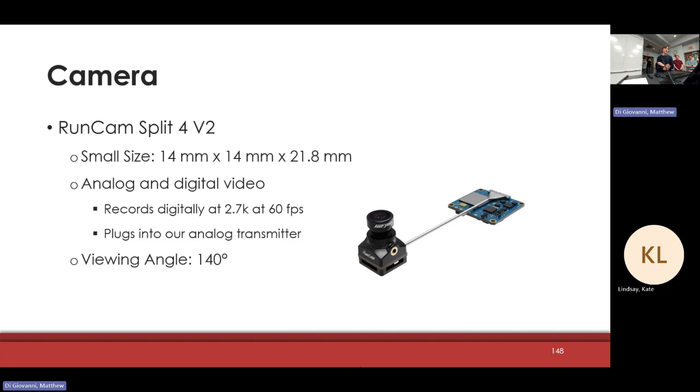So we'll have that lower quality transmission as the rocket launches, and much better quality once it's hopefully recovered. It also has a nice wide view angle of 140 degrees and only weighs about 10.2 grams, so keeping everything nice and light.

Now I'm going to leave it to my teammates to talk about direction finding.

For direction finding, we have the rocket in the sky and a directional antenna, and we need to know where to aim that antenna. To find where the rocket is in the sky, we're going to use correlative interferometry. This is the same general architecture and system as last year. It uses phase offsets on 5 different antennas to find which direction the incoming telemetry or radio wave is coming from. With this system, we can get about 1 degree of accuracy in theory.

Last year, we designed the large Luna system right there, using direct phase comparison at RF, at the 145 megahertz signal. We had improper filtering because I didn't make the design right, so the LNAs didn't work because they were amplifying basically the entire RF spectrum.

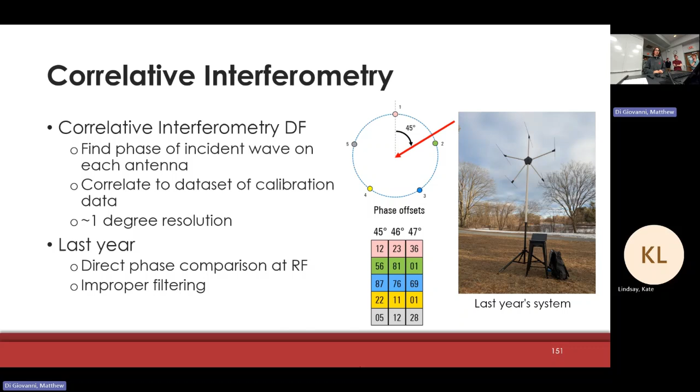So this year, I'm doing a new architecture. We're now tracking the 1.2 gigahertz live video signal, which will make the whole system much smaller since we're working at 1.2 gigahertz instead of 145 megahertz.

We're going to use a super heterodyne RF front end. So instead of comparing phases at RF, we're down converting it to a much lower frequency that we can then directly sample with a microcontroller. We're going to use this LNA from Qorvo, which has really high gain and a low noise factor, so we should be able to still read the signal even when it's really close to the noise floor. The mixer will also provide extra gain, giving us a total of 29.5 decibels of gain, and then a local oscillator to down convert.

And finally, ground setup.

Last year at IREC and in the past, we've had a lot of issues with there being a lot of stuff for the ground station, to put it simply. You've got various receivers for telemetry, APRS, and live video, and you need to be able to communicate with people at the pad. It just generally becomes a mess. At IREC, there was a whole 4x8 foot table that we used basically the entire space of because there was just so much going on. It was all a mess of cables, and it was very hard to troubleshoot and figure out what was going wrong or verify that things were actually working correctly.

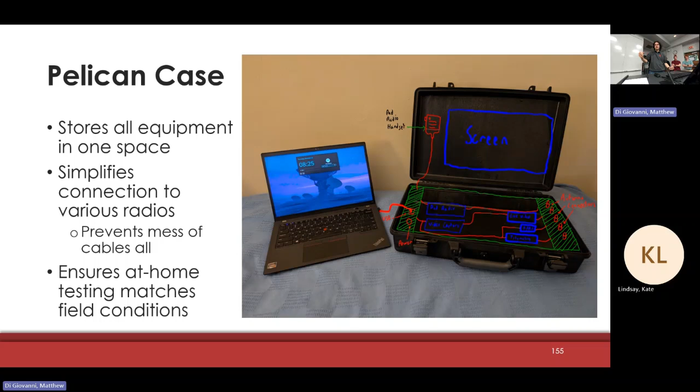One of the other things we're going to do, that did not quite work, there we go, is use a Pelican case to store most of our radio hardware. That way it becomes a lot easier. All we have to do is open up this Pelican case. We've got our antenna connectors here on the right side, which go through all of our various systems for telemetry, APRS, and so on, and then a single USB connection or two, a couple of small connectors to go to the laptop. It's all contained in this one roughly laptop-sized Pelican case rather than being spread out across that entire giant table. Makes our life a lot easier, makes it a lot quicker to set up. We'll be sitting in line with our tracker setup, and it's about 5 minutes to set up rather than 30, trying to make sure everything gets plugged in correctly.

For our software, this is a little bit earlier compared to a lot of the hardware work and planning we've been doing this term. We're going to be using Tauri, which is kind of like Electron if you've heard of that, but it's designed to be more lightweight so we don't have as much delay or lag in the system. This can use either C++ or Rust as a backend.

We're currently going to be using C++, and then it can either use JavaScript or TypeScript as a front end. We're currently going to use TypeScript because that gives you statically typed code, allowing us to actually specify that, yes, this is an integer, or this is a float, or this is a string, rather than just kind of being loose like JavaScript. That allows us to use most modern web development front ends.

In this case, we're going to be using React, just because it's a very common front end. A lot of people know how to use this compared to some of the more niche options which might perform a little bit better. But given it's just displaying information, it doesn't need to be as performant as taking all the data in. Again, we're in early stages, we've got some basic things building, but this will be one of the bigger focuses this next term and going forward.

As for the whole infrastructure of the program, we're going to have this middleware part, which is almost acting as a database in a way that handles our data export out to CSV, so people can use the data afterwards. Then we can have various different modules, either on the back end or front end, that plug in. That way we can develop each of these pieces of code in an isolated way, rather than having a giant singular backend module that handles data storage and taking data in from all the various sources, which just becomes a pain to maintain.

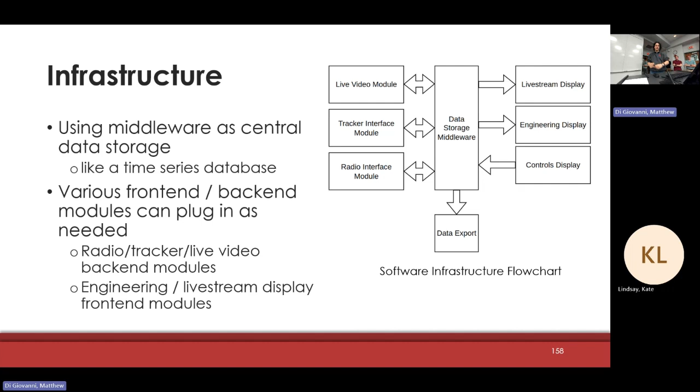And that is finally all we have. Quite a lot of slides, I know, but if you have any questions, please go ahead.

Geez, all right. There we go. I figured.

So I have some concerns about the whole coax cable along the drone shock cord thing. Is that something you have reference to other teams doing and how they've implemented it? And can you be more specific about the strain relief plan on that?

Okay. First of all, I completely understand your concerns of coax on a shock cord. When that idea was first proposed, I also thought it was really kind of a bad idea off the bat. It's not a great solution.

So a couple of different things for strain relief. First of all, the coax will be a fairly thin coax that's relatively flexible to try and avoid kinks and stuff like that. It'll also be tied to the shock cord at multiple places on its journey, and the shock cord will be wrapped in a way to optimize its exit when the rocket separates. Another idea we're considering is putting the coax inside a piece of tubular Kevlar or nylon or something really strain resistant, and then tying that at both ends in addition to the shock cord to provide direct strain relief for the coax, taking any loading that would otherwise be applied to the coax in case that scenario ever happened.

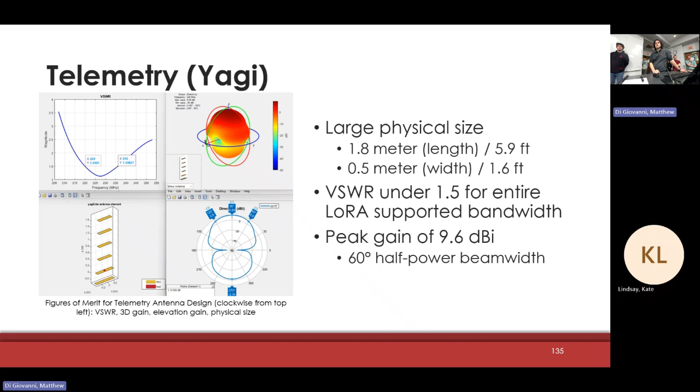Does the pad crew need different equipment for the radio receiver, or is the big mast thing able to use regular radio? For the big mast, for the pad crew, do they need anything else, or can we just do the regular radio? Yes, that's the goal - because we're creating such a larger setup on the ground station, it makes it so there's less requirements on y'all's end for getting reliable communication.

You don't have a problem with that? There were also teams with like 20 or 30 foot tall masts last year, so they had some issues. We'll probably just confirm it this year. We can confirm similarly with the tracking system, because it's a similar size when deployed, but because of how the fundamental construction of the Yagis works, it allows us to pack that down much smaller. So we're not having to fit a 2 meter long thing in the car - we're able to pack that down into a much smaller size.

It was really impressive - how did you arrive at the -60 dBm? I've been looking at this, partially I was doing this over the summer also. I've been looking at a lot of the different chips, because we're not building a completely custom radio module here - we're still going to be buying a chip that's fundamentally doing most of the RF stuff. This is like a worst case on what most of those chips would be able to take in terms of, we need a significant signal to noise ratio for their absolute sensitivity. At the absolute bare minimum, they could receive a packet at like -80, -90, somewhere in there. Most of them need like a 20 to 30 dB signal to noise ratio. So this gives us a good margin with those modules, which are a lot less sensitive than the local LoRa modules we're using this year. And slide 126.

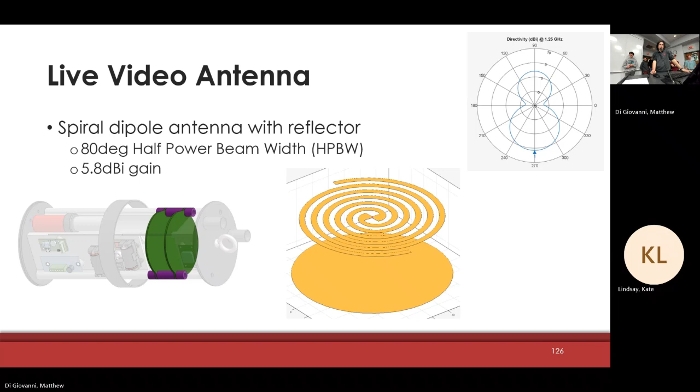Yeah, and on slide 126, I'm just curious which direction is the gain on this, and what orientation is it in the rocket - is it this orientation, or is it?

I thought there was a radiation pattern in here, but I think I added it after this presentation got copied - there is also still significant radiation on the other side. I'm forgetting whether it was almost equal or significantly less, but I think it's relatively equal.

It's also specifically for this year - obviously we want to design for future systems, but for this year that will be fine. We have so much margin in our link budget for these specific stepping stone modules we're using that some of these non-idealities will be okay. I think, Owen, you had a question?

Yes, what is your plan or strategy for not having the antenna tracker tip over? If y'all want to talk about this more, but I can also talk about it - we've been doing some research into finding trackers that have a very wide base.

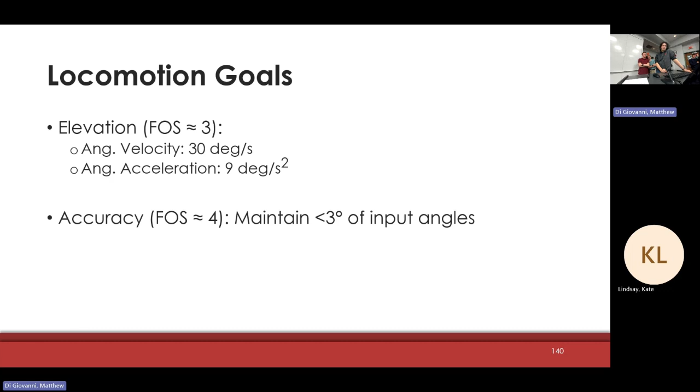One more question - also, by the way, we're over time, so if you guys don't want to answer questions we can stop. But if any of y'all need to go, I've got time, I'll keep asking questions.

For the tracker, how many of the components can be reused from the previous year? And do you have any idea of what the cost might be, considering we could hopefully reuse it?

I haven't made a bill of materials yet, but as I'm designing some concepts, I'm designing it around parts we've used last year, such as the same shaft material, some of the same support beams, aluminum channels, wood. I imagine that wouldn't be too big of a concern in cost, but the biggest cost would probably be new stepper motors and controllers, since I think we'll be changing those - specifically to ones that support the closed-loop feature within themselves. That way we're not relying so much on custom code to control those at reasonable rates, using built-in closed-loop systems from the manufacturers, which are a little better tested.

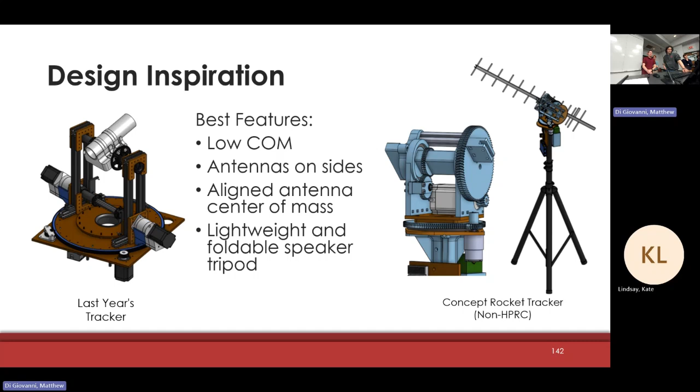As a point of note, that non-HPRC tracker costs about $250 all in. It's a little smaller scale, excluding filament also, but it's not a crazy price. No, the one on the right was about 250.